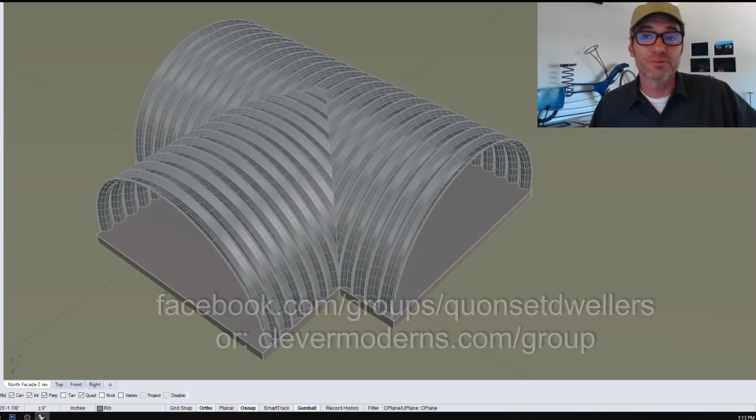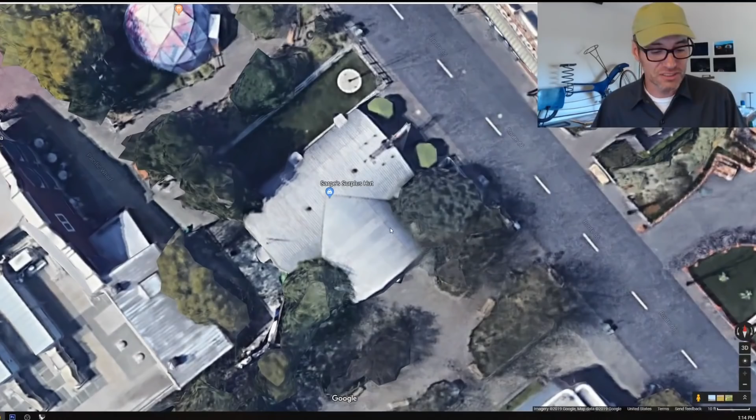So if you've been to Disneyland and you've been to Cars Land, you may have seen a T-shaped Quonset hut right there, right? So turns out Sarge's Surplus Hut, which is the gift shop there in Cars Land, it's a really cool building. It's a T-shaped Quonset hut. And so here on just Google Maps, it's a pretty cool building.

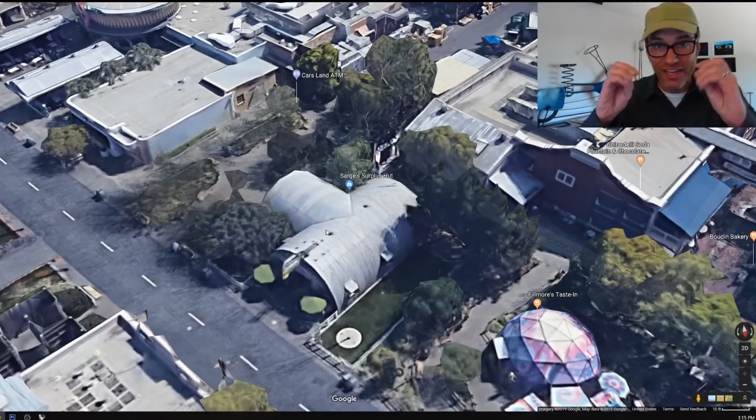Now, you got to remember, this is Disney, all right? So for them to build a T-shaped Quonset hut is like another stage set for them in a way. And they've got armies of engineers and Imagineers and designers and custom craftsmen and women and people that can make all the things, right? So their ability to do this is far beyond those of us mere mortals, right? With this kind of thing. So just a little kind of a caution there. Disney can do it, but that doesn't mean it's necessarily very feasible for the rest of us.

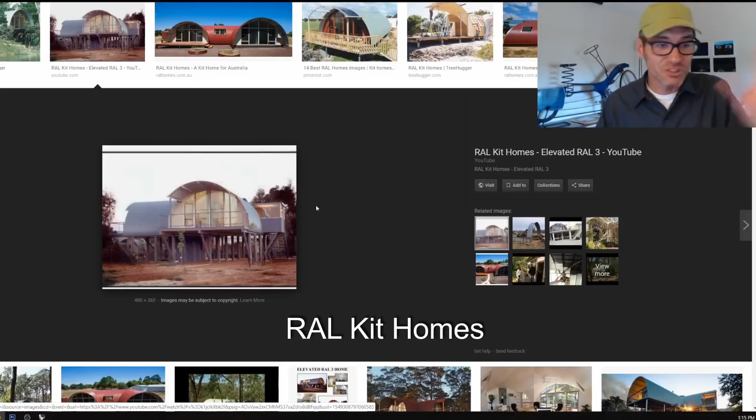Now, another thing you may have seen is the RAL Kit Home. Now, this is a product out of Australia. The RAL Kit Home, as you can see in these images, this is, again, a Google image search. I love showing Google image searches here on the videos because they're just easy to show you a range of things. So these appear to be like a Quonset that has these side connections of the arch, but here this picture sort of reveals it.

Turns out the RAL Kit Home is a wooden frame with a metal skin over the outside. Totally different technology from the Quonset hut, which is a metal panel structural skin that is self-supporting. So as you can sort of see in this image, it's a little small. There's better pictures online, and we'll come back to one. But this is a wooden frame, totally different technology.

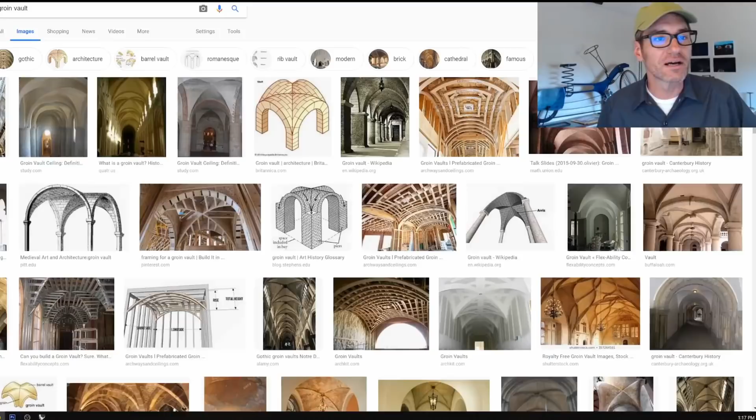Okay, but the idea goes back to the ancient Romans. It's called a groin vault. So the shape of a Quonset hut is like a barrel vault. Just a round extruded shape. That would be a barrel vault. If you intersect two barrel vaults at 90 degrees to each other, like an X, you can get this shape that's called a groin vault.

And in ancient construction technology, this is pretty high tech. It was invented by the Romans. It was developed further in the Gothic period, and then revived in the Renaissance, and it's a very efficient way to make a more open type of space, okay? So the question comes down to, can you do this with a Quonset hut?

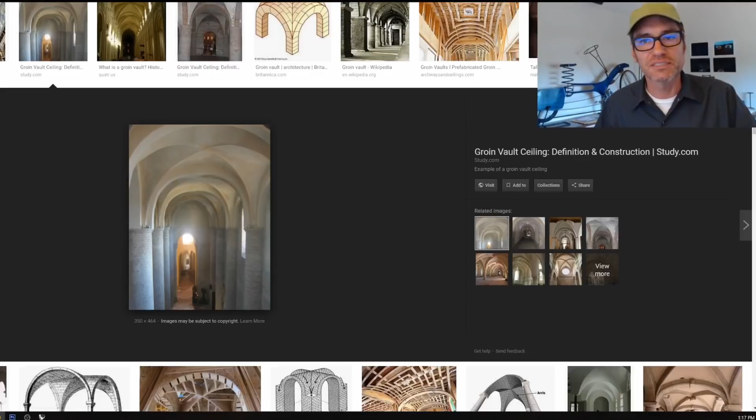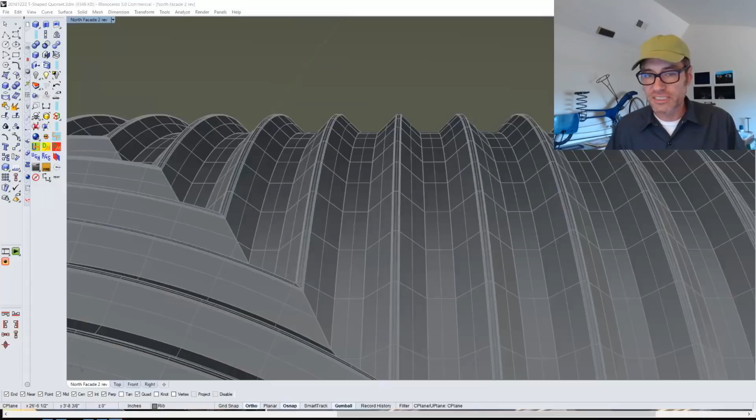So here's an image at the compound of our own Quonset build that we're building in northern Arizona. And here you can see the way the arches are shaped for our buildings. I've measured these carefully and modeled that here in my 3D model. And then I just took it and chopped it at a 45-degree angle, really precisely, and then refit them together.

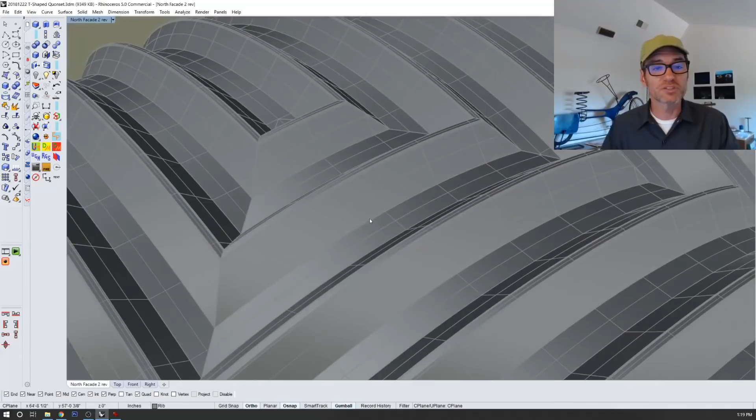How this would work. Now here are the problems that you're going to get into with this kind of structure. Basically, on the arch here, if we look where my mouse is, you have this V shape which funnels the water away from the bolts. The bolts are on the top of the ridge, and the water gets funneled down into the valleys, right? And then it runs down the side of the building.

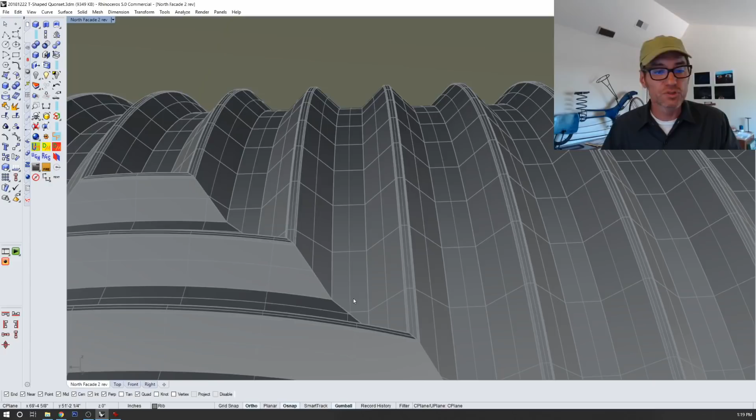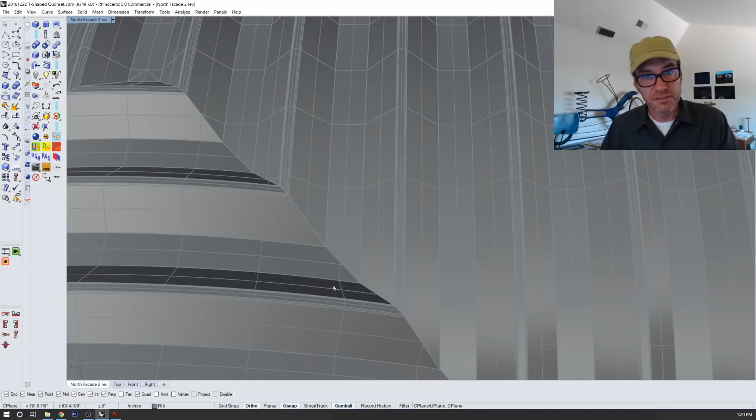So what's going to happen here is this. You're going to have water funneled down through the valley until it meets the 45-degree cut. And then the water from the perpendicular side is also coming down into that 45-degree cut zone, right? But the high side of the arch, where the bolt line is, is going to form like a dam in the corner, and the water will fill in behind that.

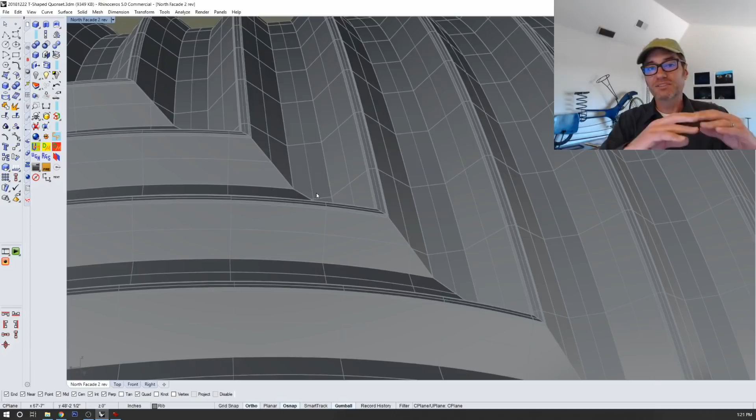So, massive waterproofing issue. One of the things that's so beautiful about the Quonset hut is the way this metal shell has complete structural integrity, and when you build it correctly, it's a very watertight shell. So the minute you try and fold it back against itself at a 45, you get these cascading little ponds that come down the building. Water is going to collect in those all the way along and back up. So there's a big waterproofing problem.

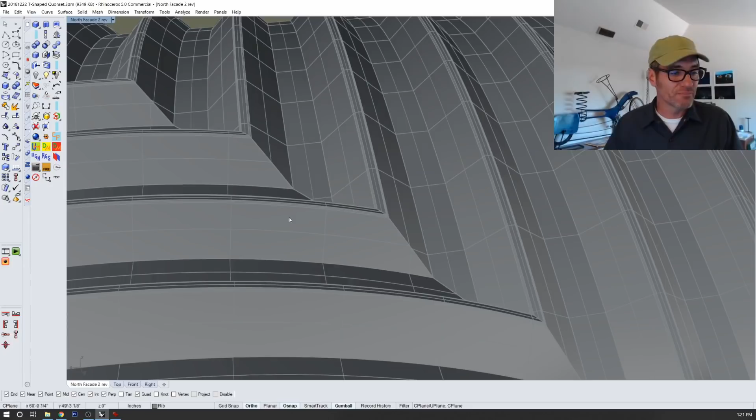The second problem, though, is just structurally. In the example of a Roman groin vault, this is all masonry or concrete construction, right? So the mass of the brick or stone or concrete can be cut and fitted together, and the forces are pushing in an equal way on each other. If we look at this example, the force coming down from this arch and the force coming down from this arch can be transferred and counterbalanced, and then transferred into this pier at the corner. With masonry or concrete, you can get a good connection. The materials are massive and can go up against each other and push.

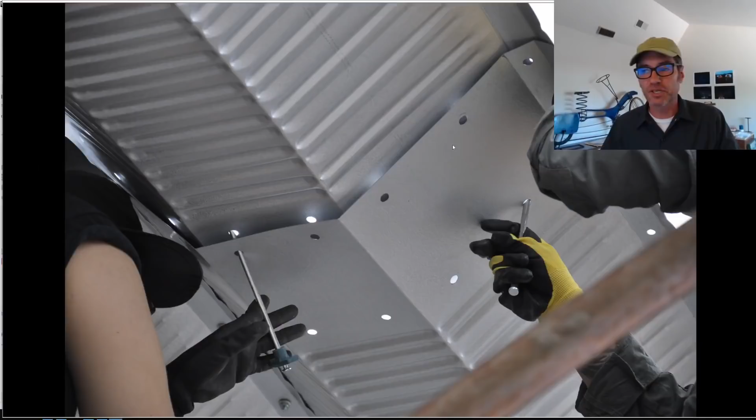Now on the Quonset hut, though, you have to understand the way the structure itself goes together. If we go back to our image here, this is made of a series of thin sheet metal panels, all bolted together. Each panel is about 10 feet long, and they overlap and bolt together. What you're seeing in this image are the areas where the panels overlap. Here's another image from our build under construction: you can see where the two panels go together, and there's like 16 bolts at the overlapping area where one panel overlaps onto the next.

So the way the panels connect is critical, and it's part of the system, where the panels go together to form an arch, and the arches go together to form the building, and it's all systematized and engineered in this particular way. So when you look back here in the 3D model, when I hide this, you can see it's a very thin shell. And now you're cutting it at an angle, and there's no way for the panels to overlap.

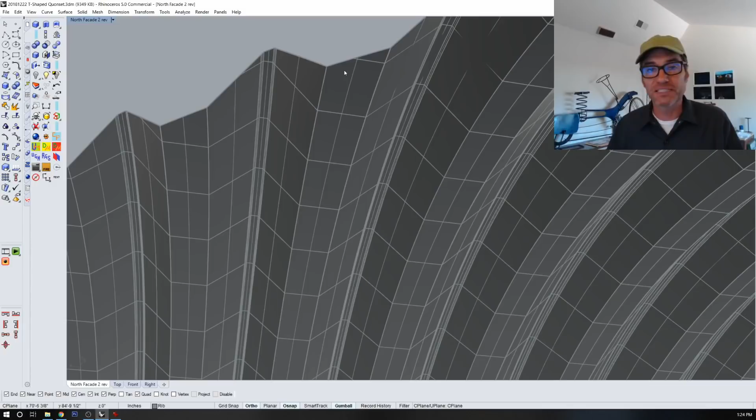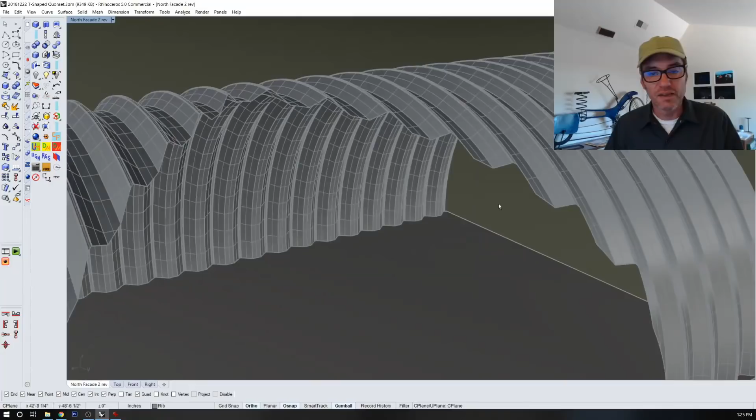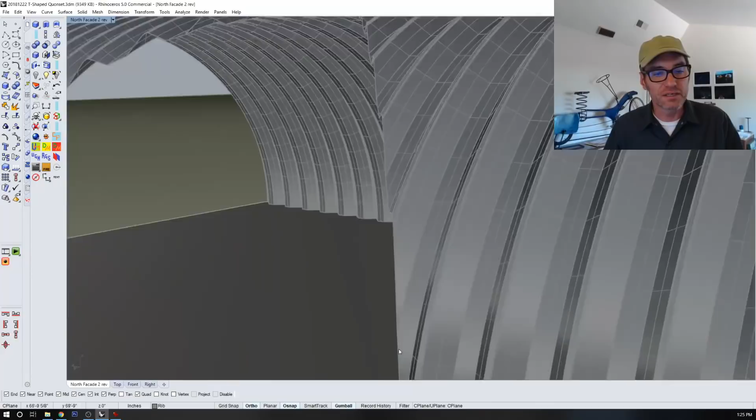Now, you could come up with a different kind of connection, but be aware, because of the way this 45-degree cut goes down the side of the building, look how different the profile of the panel edge is at the top versus farther down, because the panel is sliding down at a different angle. Up here it's more perpendicular to the panel, not really perpendicular, but more. And way down here, it's at a much steeper angle. So the way each panel connects to the next one is unique. There is no duplication of shape to any of it.

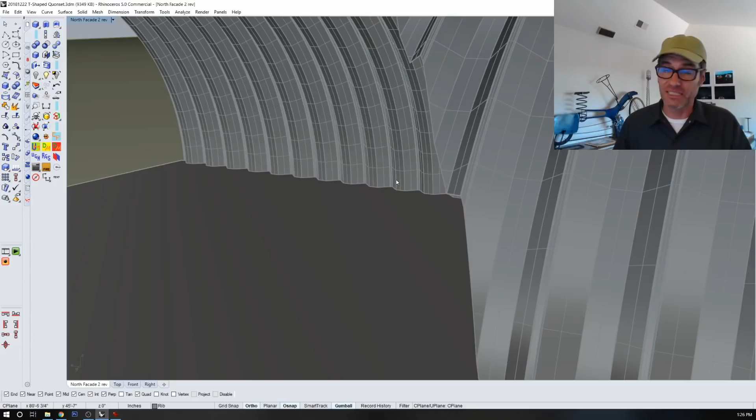The structural connection, how these two panels will go together, I have no idea how you would do it. I'm not saying it couldn't be solved, but I just have no idea. You could add a curving beam underneath. So one possibility would be a curved glulam beam. Now, what is a glulam beam?

Glulam is short for glued laminated. It's a series of pieces of wood, 2x6s are not uncommon, layered, glued and laminated together to form a single beam member. Because they're formed out of multiple layers, they can bend them in the factory to a specific shape and curve. These are fabulous things, I think. Structurally, I get excited about curved glulams.

They're used, they're not all that uncommon. Here's one in a church, and I actually grew up going to a church that was built in the 50s or 60s and had these massive curved glulams that had kind of like multiple shapes built into them, and it was a really neat thing, and I've always loved them.

And there's some really great ones, just Google curved glulam beam and get this eye candy. There's some great ones. This one I particularly like. It's like you're in a Viking ship or something. So it's really great. Curved glulam, they're also crazy expensive because they're very custom built. A regular straight glulam beam is not that expensive, but a curved glulam beam is extremely expensive.

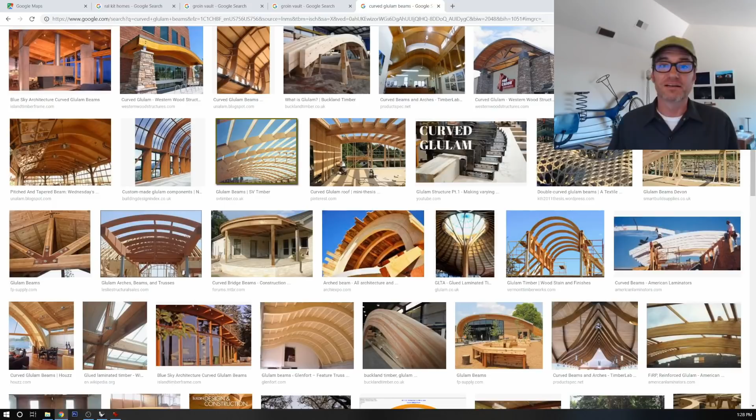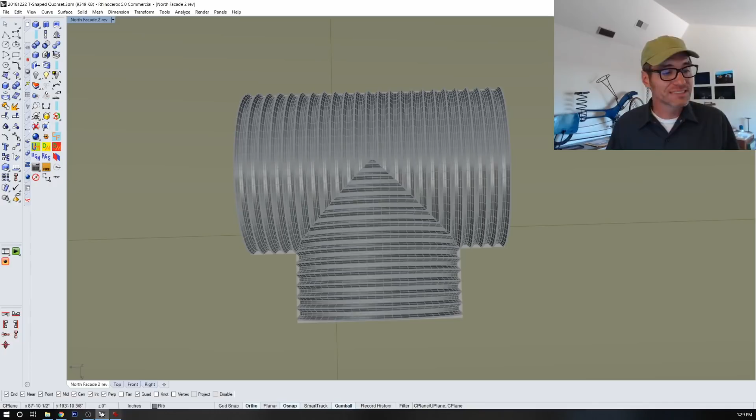Curved glulam is kind of an option. You could do a curved steel beam, even more money. But there's ways. So, okay, those are some thoughts that I have on a T-shaped Quonset. It's really a departure from the standardization that makes Quonset huts so great in terms of cost effectiveness, in terms of ease of do-it-yourself building. And I said I would come back a little bit to the RAL kit home, just because I do think these are extremely cool.

I'm not sure they're still making them, you'd have to kind of look around online, and it's not clear to me what's going on with the company at the moment. And I really don't know much about them anyway, but there is this website where some people built one and documented it extensively. I'll see if I can put a link in the notes below. These people built one, documented it thoroughly, tons of photos, made a great little website. And they did theirs, I think, around 2006, so over 10 years ago.

And if you make it to Disneyland or Disney World, go to Cars Land and look for Sarge's Surplus Hut. It's a cool structure. It's clad in corrugated metal that is not the same shape as the metal Quonset hut that you would buy and build yourself. So this is clearly an engineered, custom-made structural thing that the Disney folks have put together. And they've used for the interior ceiling the same metal that they put on the outside. So when you go in and look up, it sort of looks like you're just looking at the metal of the roof, and you're actually looking at a ceiling that is concealing the structural system.